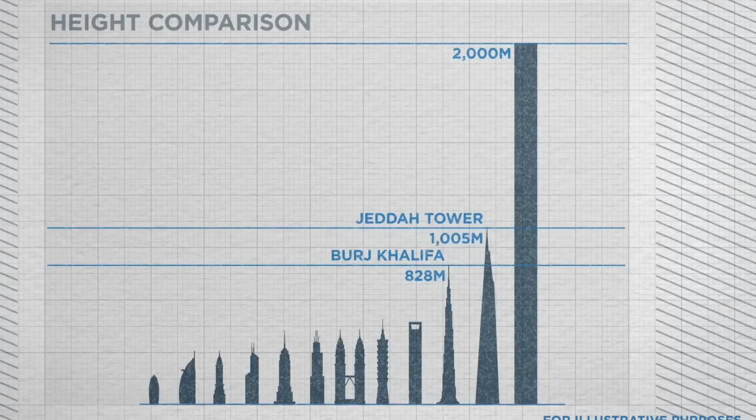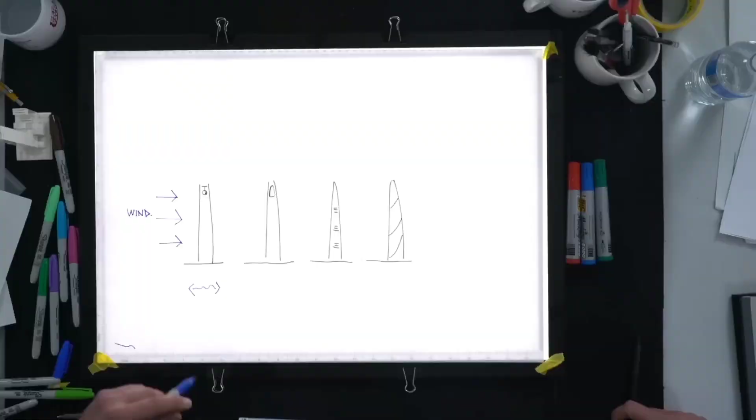Imagine a building that dwarfs even the largest buildings in existence today, a building that spans 2 kilometers into the sky. Saudi Arabia's planned mega tall tower is a project that pushes the limits of engineering and design, driven by this bold vision. But building a tower that big comes with its own set of problems.

We'll talk about how they plan to deal with problems like wind resistance, elevator service, and even the idea of a building itself. Will this building really become a reality? If it does, do we have to be scared of anything? Join us as we talk about the clever fixes being thought of to make this 2-kilometer monster a reality. This is one of the most risky projects Saudi Arabia has ever started.

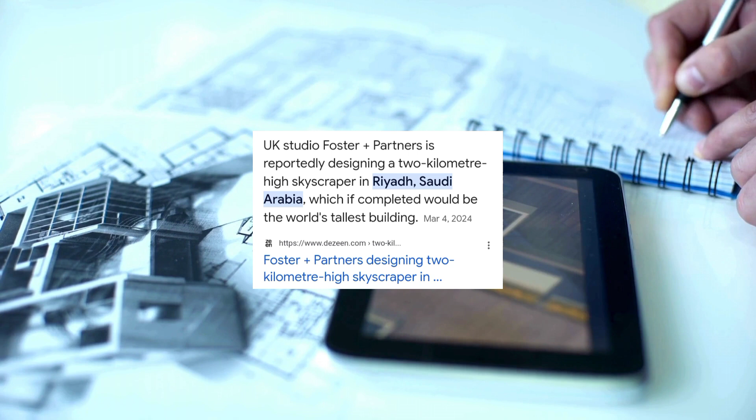This comes from the people who made Neom, a future utopia. Foster & Partners, the architecture firm run by Norman Foster, is planning to build the world's largest building, which will be 2 kilometers tall. It would be much taller than Dubai's Burj Khalifa, which is 828 meters tall. The British magazine Architects Journal says the skyscraper will be built near Riyadh International Airport, north of the Saudi city. Foster's studio is also remodeling the capital.

As of now, there are no pictures or details about the design showing how it will look. The Dubai building, the Burj Khalifa, is 828 meters tall and was finished in 2010. This building would be more than twice as tall. Contractors in the area say that any tower 2 kilometers tall would cost around $5 billion to build. The Burj Khalifa in Dubai is currently the biggest building in the world, standing at 828 meters.

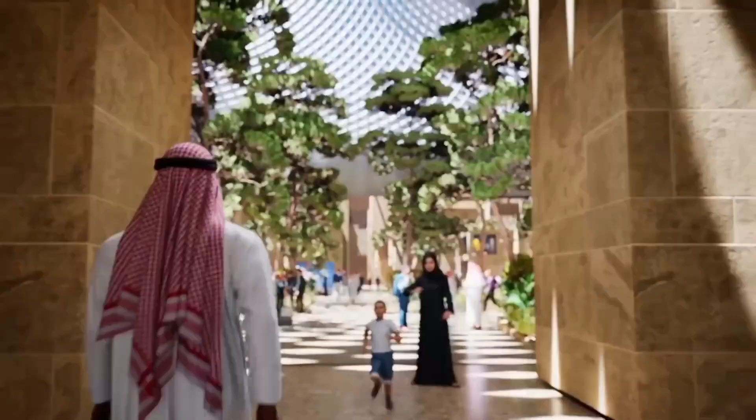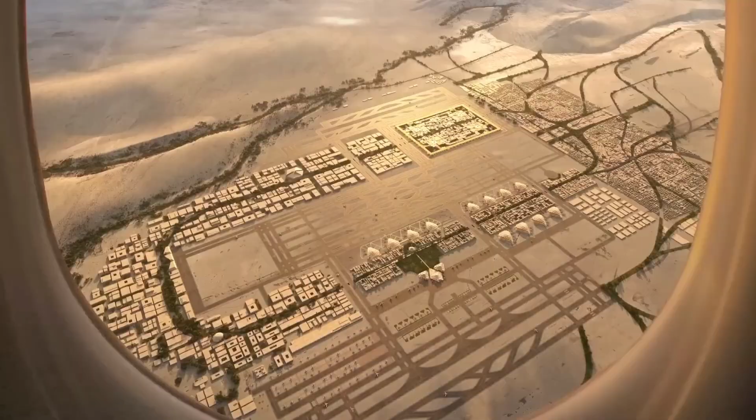Saudi Arabia is in the middle of a building and mega-project boom, with many projects already in the works. KSA's King Salman International Airport will soon be one of the biggest airports in the world - that's what it wants to be. At the moment, King Fahd International Airport in the kingdom is the largest airport in the world by size. The new airport will have 6 parallel runways and existing buildings named after King Khalid, covering an area of about 57 square kilometers.

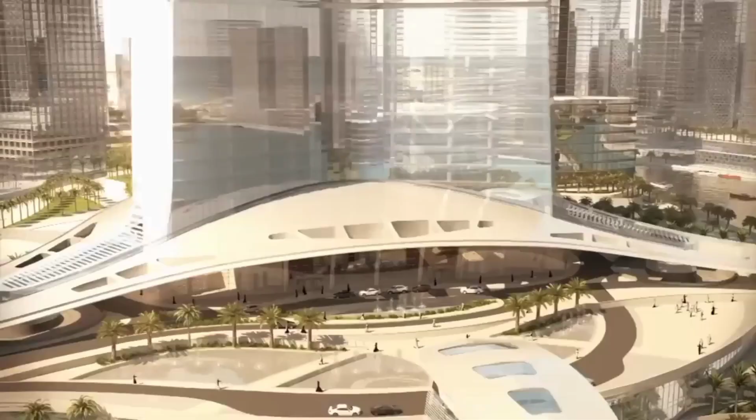In other parts of the kingdom, Saudi Arabia is building the $500 billion megacity Neom, a high-end ski lodge, and The Line, a 170-kilometer-long city of the future that will not have any roads. The only other buildings in the world taller than 800 meters are the Burj Khalifa and the Jeddah Tower. You can see that the floors of both are shaped like propellers or 3-pronged stars.

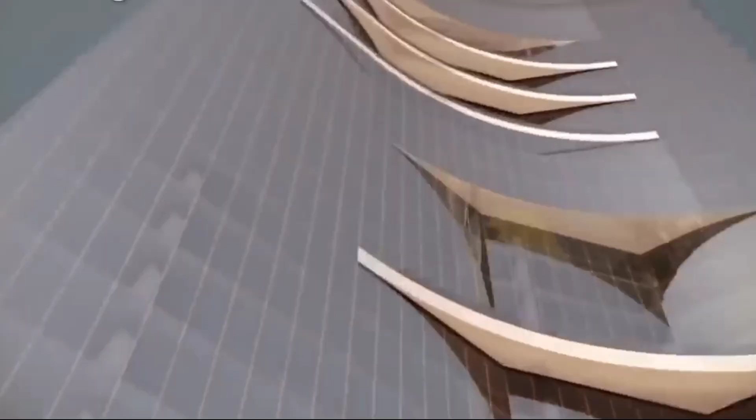When it first opened in 1976, the CN Tower in Toronto was the first building of its kind. One benefit of having a core shaped like a blade is that it makes the building very stable and resistant to wind. At the same time, the number of buttresses needed in the core severely limits the amount of usable room inside. Because of this, the CN Tower, which has most of its people on the floors at the very top, did not have any problems.

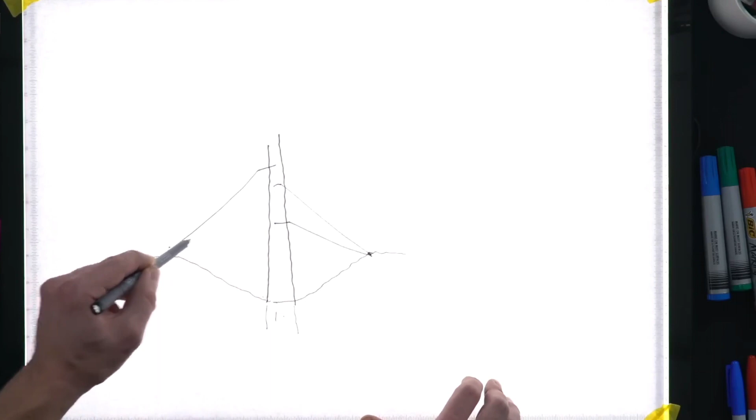Tall buildings like the Burj Khalifa, the Jeddah Tower, and others have to make this trade-off. Engineers just haven't found a better way to build something that tall with the tools and materials they currently have access to. A less strong core design, on the other hand, can be made up for with other parts. As the height of a skyscraper rises, it becomes more exposed to wind damage. This happens because of the lever action that horizontal forces at the top of a building create.

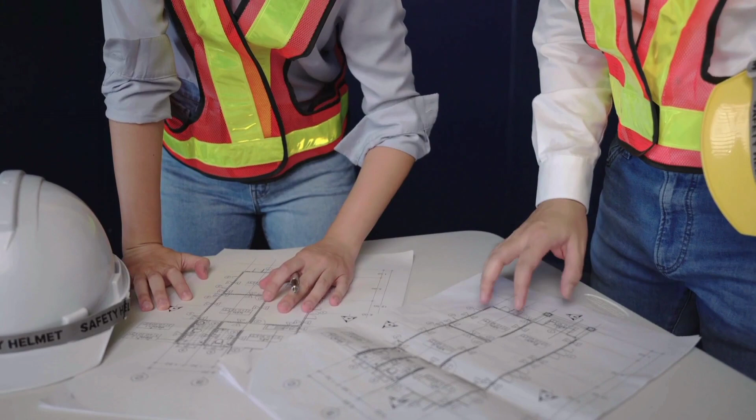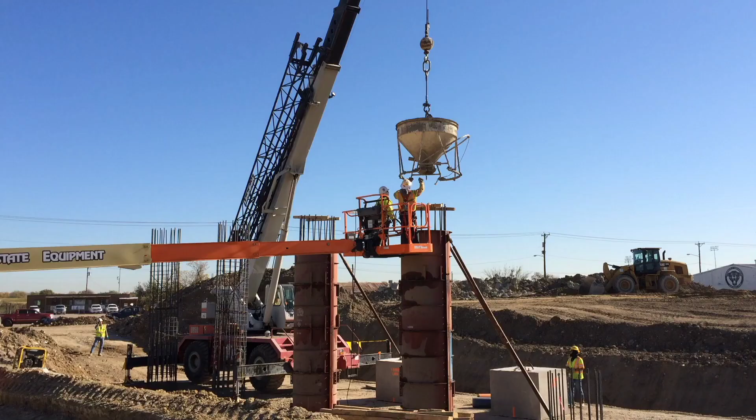A lot of other buildings, like the 632-meter-tall Shanghai Tower, have curved outside construction. This gives the building a nice shape and also helps block wind along the whole length of the tower. The architects of a 2-kilometer-tall building could think about these possible options. However, there's an important thing to keep in mind: all of these features have been made for buildings that are a little more than half the height of the skyscraper Saudi Arabia wants to build. It remains to be seen whether any of these combinations will be enough.

About materials and foundations: with a background spanning decades, Peter Weismantel is the consulting director of super tall building technologies for the Chicago-based Adrian Smith and Gordon Gill architecture firm. The 88-story Jin Mao Tower in Shanghai was designed by him and his colleagues at Skidmore, Owings and Merrill, or SOM. He joined the Burj Khalifa team in 2003 and is now their senior technical architect. He also collaborated in the design of the Jeddah Tower after leaving SOM to work with Adrian Smith, the architect of the Burj Khalifa.

Because of his extensive background, Weismantel is knowledgeable about the technical aspects of designing extremely tall buildings. Furthermore, he believes that the construction industry is capable of constructing structures up to 2 kilometers in height and beyond.

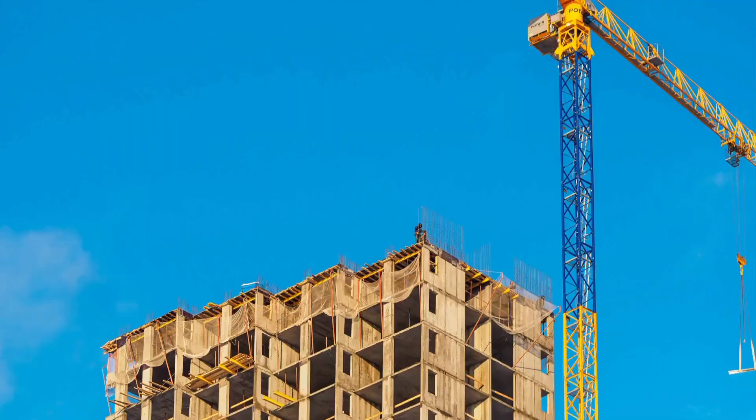Other considerations, however, take precedence. Weismantel is more sure that builders and construction companies will be able to build even taller buildings. Two kilometers sounds pretty reasonable to him. Is it the limit? I doubt it, he adds.

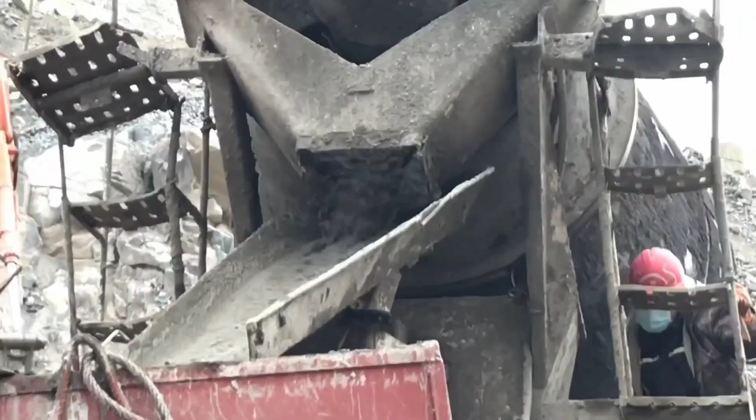The 1 kilometer tall Jeddah Tower project has been put on hold, but Saudi Arabia has plans for a 2 kilometer tall tower. The buttressed core structure system of Burj Khalifa is made up of hexagonal concrete walls that support each other.

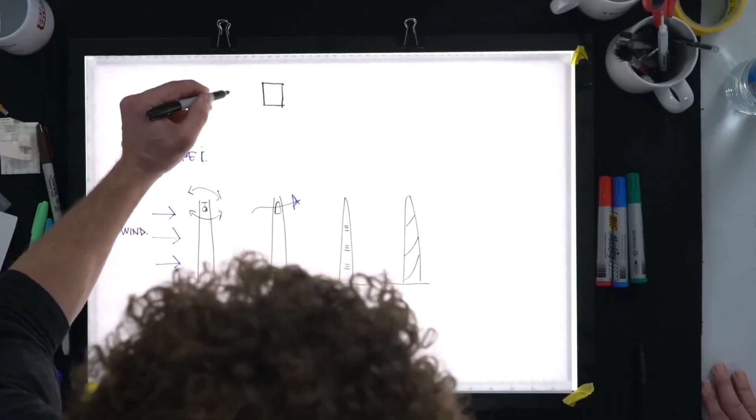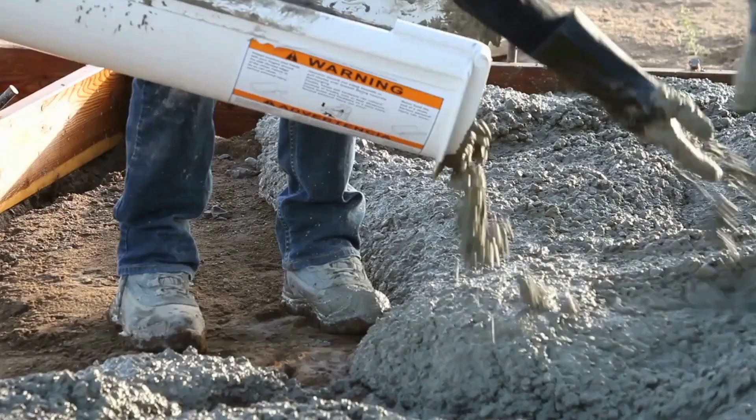Weismantel thinks that concrete is the best material for building very big things, mostly because it is heavy. Weight is good for tall buildings because it helps fight the wind. You plan for wind in big buildings, even ones that are likely to be hit by earthquakes. When the wind hits a building, it excites it perpendicular to the direction of the wind because of vortex shedding. Concrete is really good because of its mass, it gives a natural dampening.

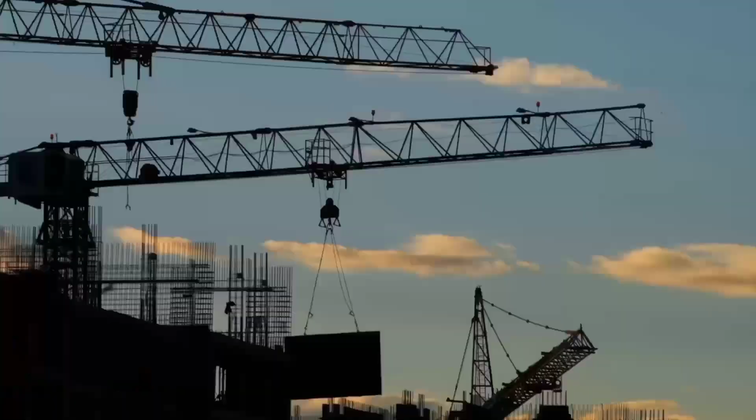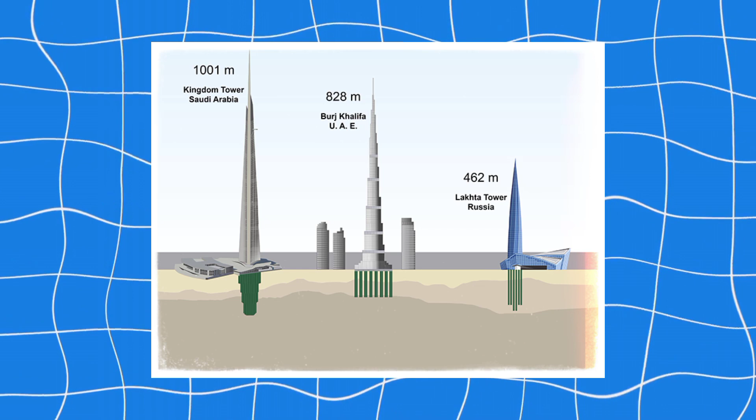The hard metamorphic base in New York, where Weismantle grew up and first became interested in tall buildings, is perfect for supporting the weight of tall buildings. But in other parts of the world, the ground conditions mean that the foundations for very big buildings need a lot of construction work. Both Burj Khalifa and Jeddah Tower are built on foundations made of friction piles and a 4-meter deep mat that ties all the piles together.

This is because there is no bedrock close to the surface. The friction piles in the Jeddah Tower were 105 meters deep. Conditions like these make it technically possible, but they also raise the cost.

Ahmad Abdelrazaq used to be in charge of the high-rise and complex building section at Samsung C&T Corporation. He left to start his own company, Rise Global. He worked at SOM on the Burj Khalifa's plans before going to work for Samsung on the project. He also worked on the 679-meter-tall Merdeka 118 building in Kuala Lumpur, Malaysia. This means that he designed and built the world's tallest and second tallest buildings.

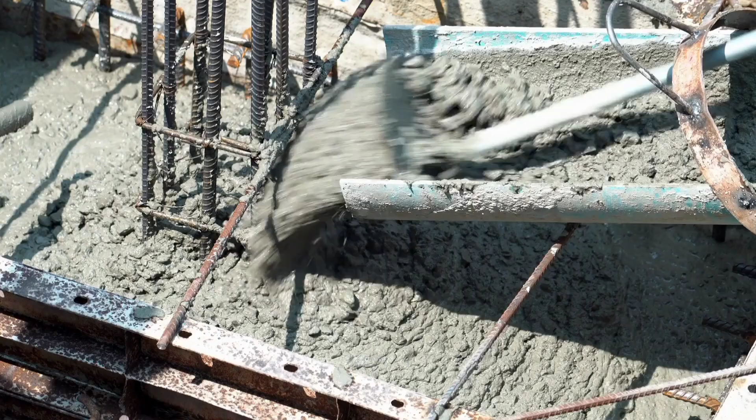According to him, normal weight concrete is the rule right now, but ultra-high performance materials like steel fiber reinforced concrete can make buildings lighter while also making them stiffer, stronger, and more tensile. He does say that building rules aren't quite up to speed on what high-performance materials can do yet, which limits how construction teams can use them inside buildings.

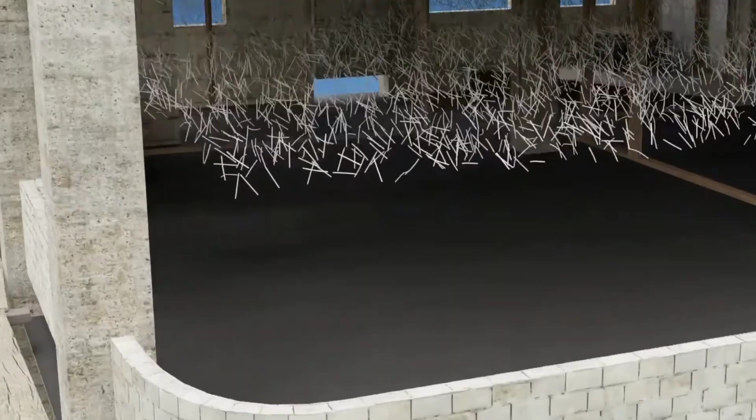Still, as a visiting professor at Seoul National University in South Korea, he has worked with students to think about how current very tall towers could be redesigned to use new materials and building methods. He says that using fiber-reinforced concrete instead of regular concrete could cut the weight of the Jeddah Tower by 30% if it were built in the same way.

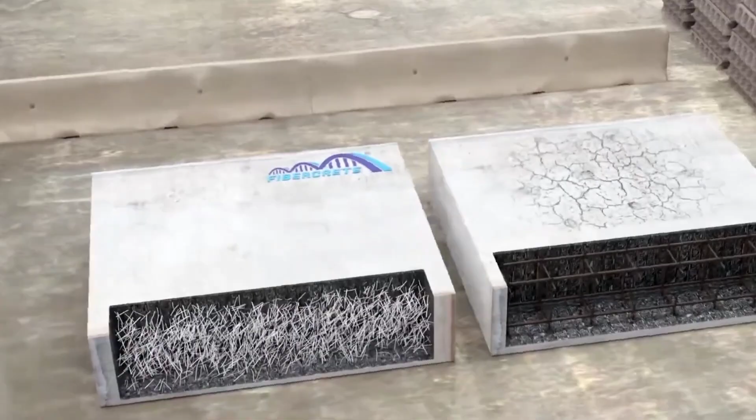Besides lowering the amount of carbon that is built into the building, that would also make it stronger, last longer, and be less likely to be damaged by earthquakes, since a building's seismic load is based on its weight.

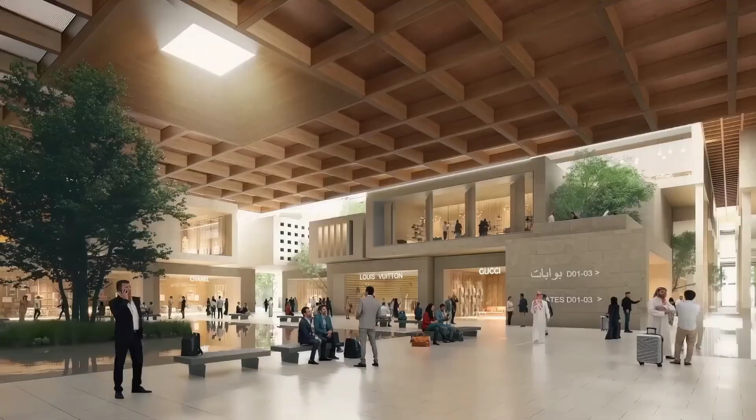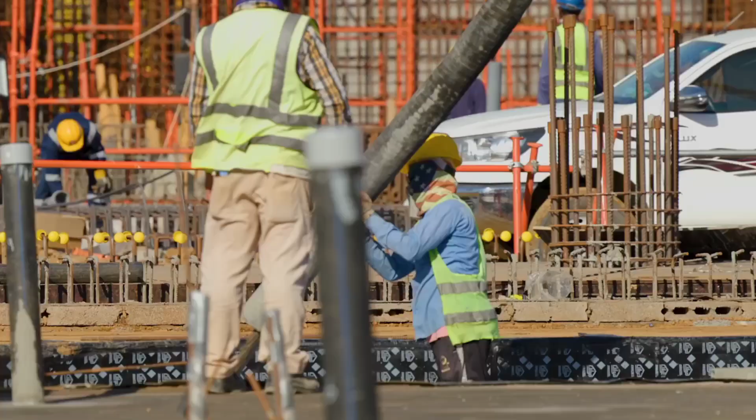Other Saudi Arabia megaprojects: King Salman International Airport. It is anticipated that King Salman International Airport, designed by Foster & Partners, would be one of the largest airports in the world. It will encompass an area of roughly 57 square kilometers, and will be able to accommodate 6 parallel runways in addition to the terminals that are already in place and are named after King Khalid.

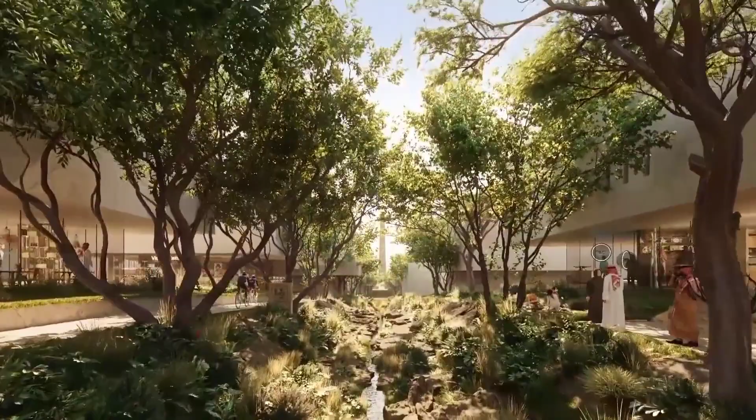In addition, there will be a total of 12 square kilometers worth of mega airport support facilities, residential and recreational facilities, retail outlets, and other real estate related to logistics. It is the goal of the airport to accept up to 120 million passengers by the year 2030, and by the year 2050, to accommodate 185 million passengers with a cargo capacity of 3.5 million tons.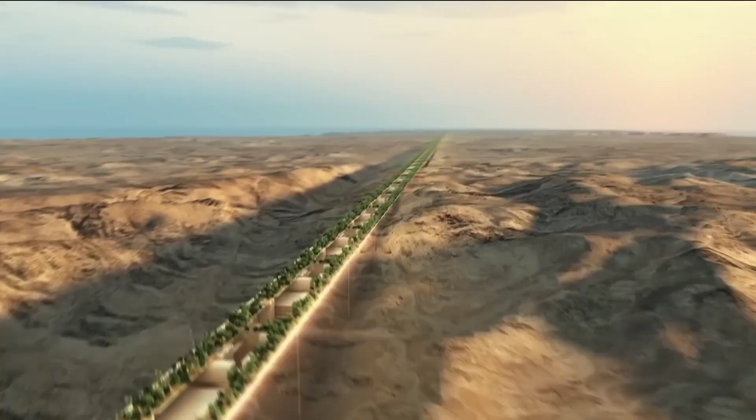The Line. People are still arguing about the Line. Critics are mainly worried about how it will affect human rights and the environment. NEOM is a big part of Saudi Vision 2030, which aims to grow and expand the kingdom's economy while also leading the way in global development. The Line is one of the biggest and trickiest building projects in the world. It will start being built in 2021 as part of NEOM's ongoing growth.

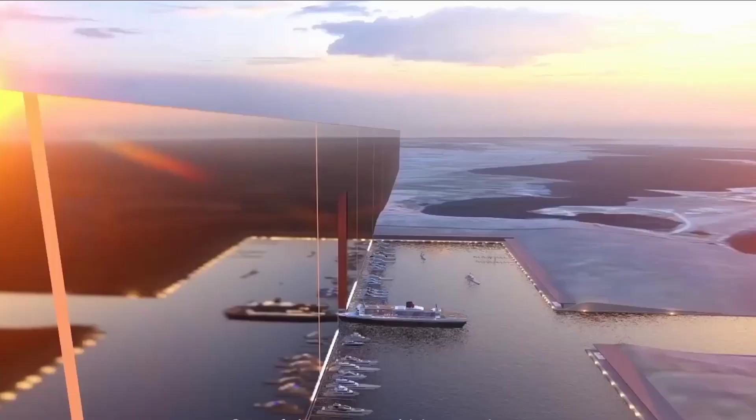The project is a new way to build cities. It covers 170 kilometers and has many communities that are linked to each other and have natural and pedestrian-friendly areas. It puts people and the environment first. Big areas of land have been set aside for conservation. The Line covers 34 square kilometers and goes from the coast of the Red Sea to the northwest of Saudi Arabia.

Trojena. As a new tourist destination that can be visited all year, Trojena is said to have a ski town, ultra-luxurious family and wellness resorts, a lot of shops and restaurants, and sports activities like a ski slope, water sports, mountain biking, and an interactive nature reserve.